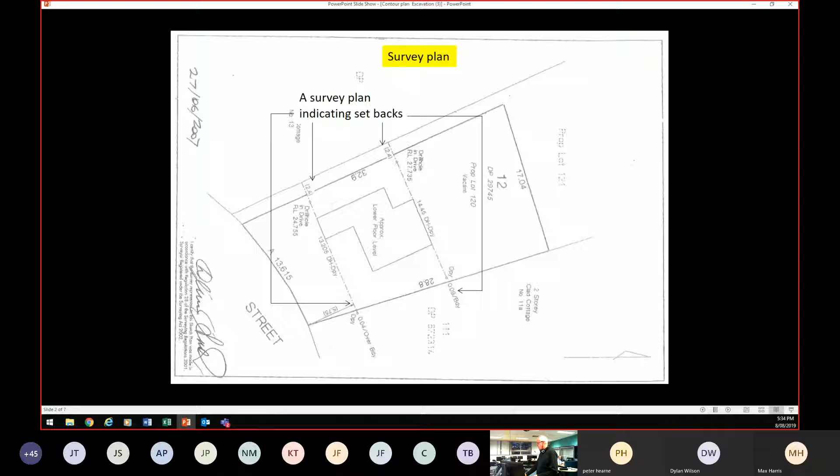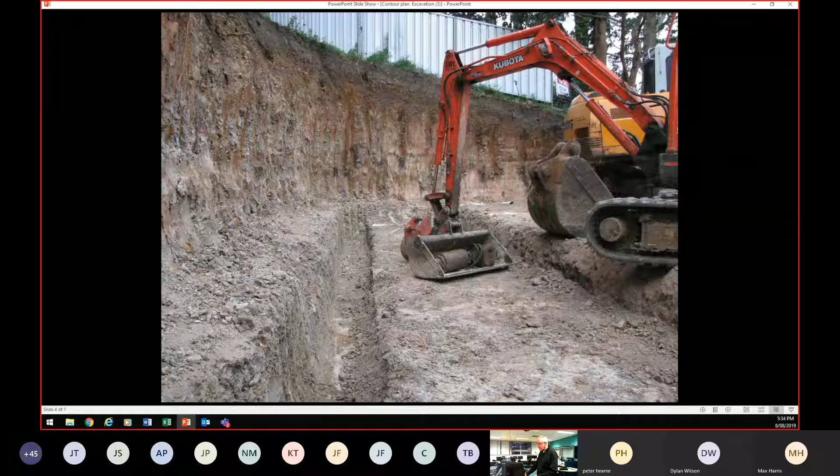This is the contour plan. Now, the next thing that happened from that was the design. In this design, they've elected to go into the hill, they've elected to design the house so there's a garage and entry underneath the house. So this is why you build - you have a contour plan. This height here was around 3.6 meters, 3.4 meters I think it was. So that's a heck of a long way in, and that was a heck of a lot of soil that came out of there.

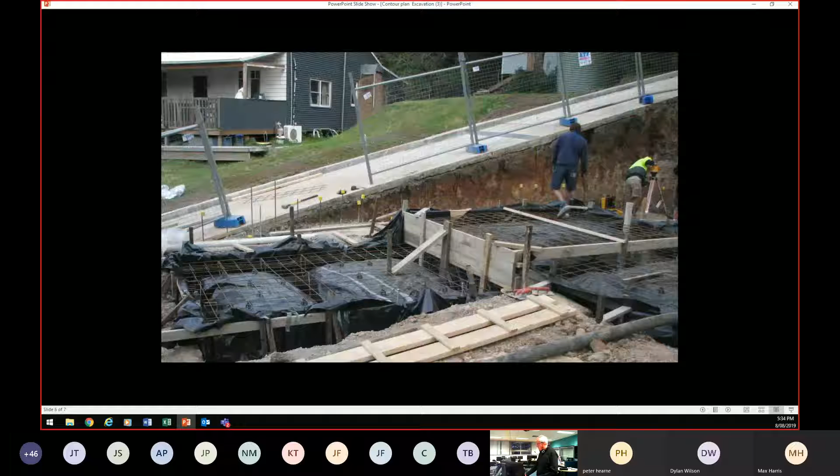And you can see the house was designed for the side of the hill. You've got a maximum height of 9 meters. So this had a skillion roof on it, which was about 8.8 meters, nearly parallel with that driveway there. So the architect actually designed the whole house to suit the block, and the contours play a big part in that. All right, now that's the main thing with contours.

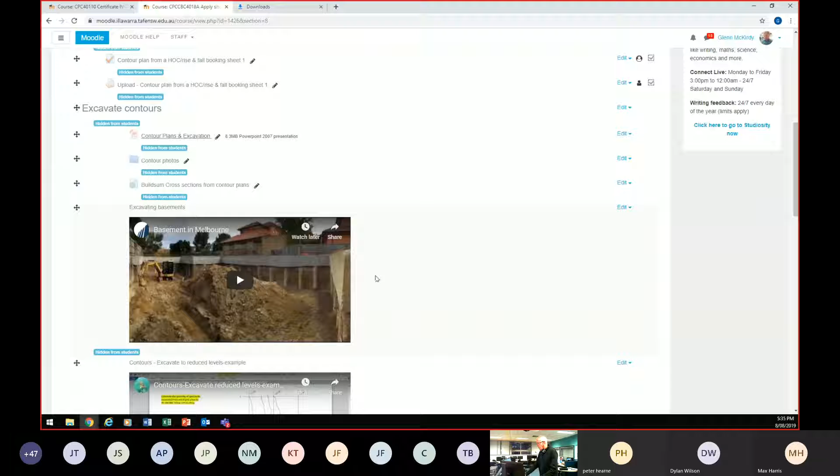I just wanted to show you two other items as well. We'll go with this one. Okay, this is another one. If we look at this, hopefully you can see it. Okay, this is a preformed estate, so they've got different levels here.

So you've got to design whether you actually excavate into the hill and put a garage underneath it, or do you go over the hill? What are the advantages and disadvantages of going into the hill or over the hill? Well, there's advantages and disadvantages in both. If you go over the hill, you're saving the money on excavation, but you've got to actually build the house, you've got to have something underneath the house. But by having a section of the house raised off the ground, it has room for water tanks and some storage. So for my way of thinking, I'd rather build over the hill and not go into the hill myself.

Okay, so that's just that. There's only a couple of photos. That's the house. The house never went any further into the hill. It had a garage in front of the hill and then went over the top. No more excavation was required.

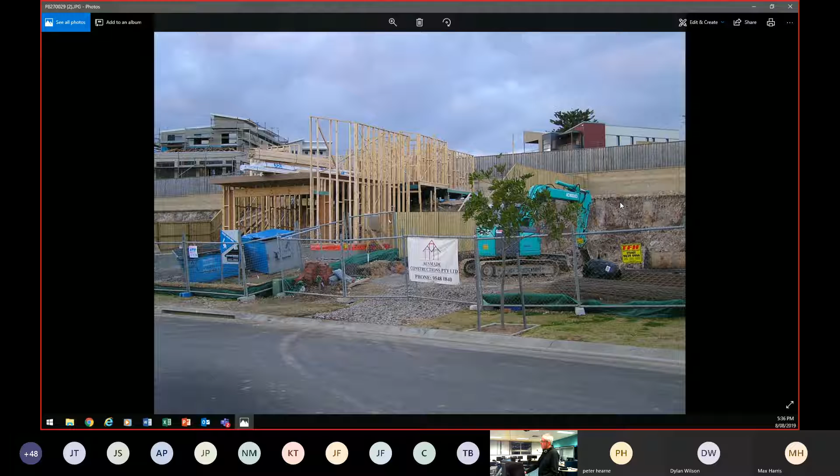Other houses in this estate went further into the hill. They wanted a deeper section in there, to try and extend the house. But for things like that, it costs more money. It can cost more money depending on the design.

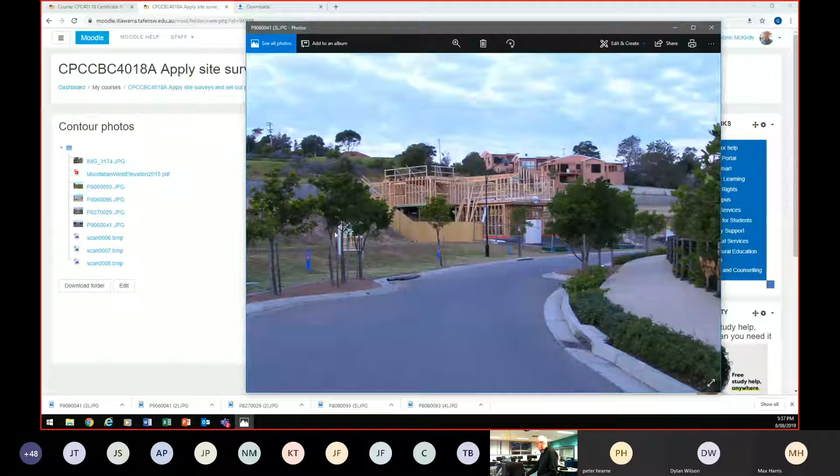That's just another photo of that same house, but you can see the land, the reason for contours. This is the reason that we have contours, though it's not specifically the reason why you're drawing them. I've never, bar at TAFE, drawn a contour - tell a lie, I've probably drawn one. But I knew what a contour plan was and understood it. What you'll get from doing this is an understanding of why you need a contour as well.

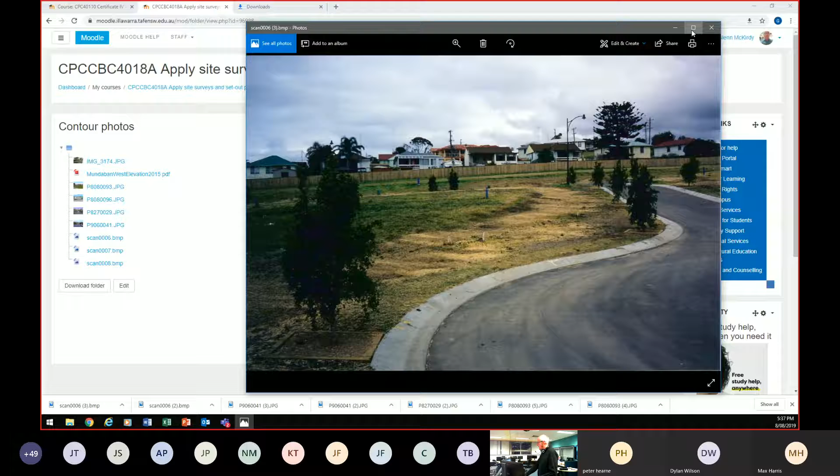There's one. This is another one, just another block of land. How do you design a house? If you look at this, that's on the other side of the road up there. This has maybe a 3 meter fall in the land. So there's a house that goes on that had a contour plan with it, and all these blocks have contour plans with them. You need a contour plan to design your house.

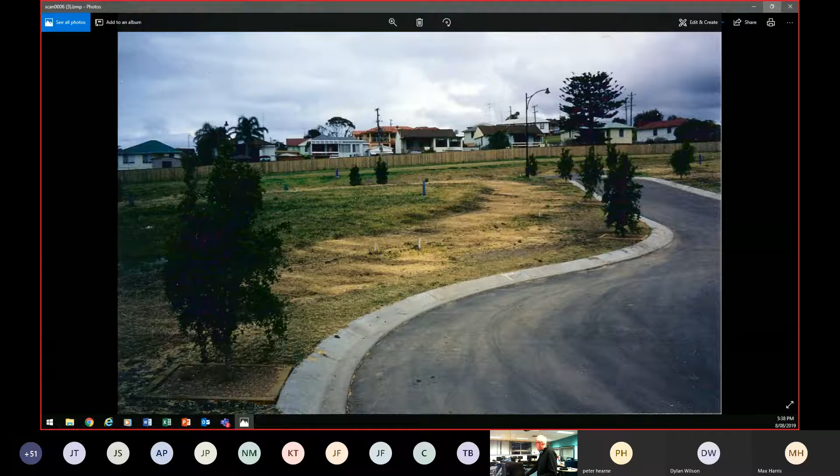Now the wash up for that one was the house from that last block of land. It didn't go into the hill, it went along the hill. There was no excavation for a garage, yet you could excavate for a garage if you want. If I could show you this house around the corner, they excavated underneath for their garage.

So contours play a really important part in the building process. If you looked at this place here, virtually only the footings were excavated. There was no excavation for the slab, no basement area, nothing else. So it actually followed the slope of the land. It had a maximum height - that height couldn't exceed 9 meters, and that height couldn't exceed 9 meters either.

But you could follow that 9 meter slope of the land. Same with that other place, and that's a contour plan for you if you're going to start designing houses or building houses or renovating a house that you already own. You've got to be aware of what you can actually do with it.

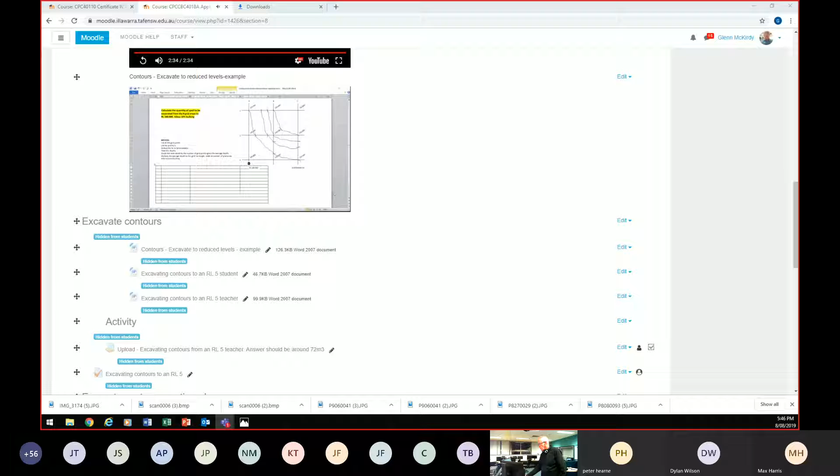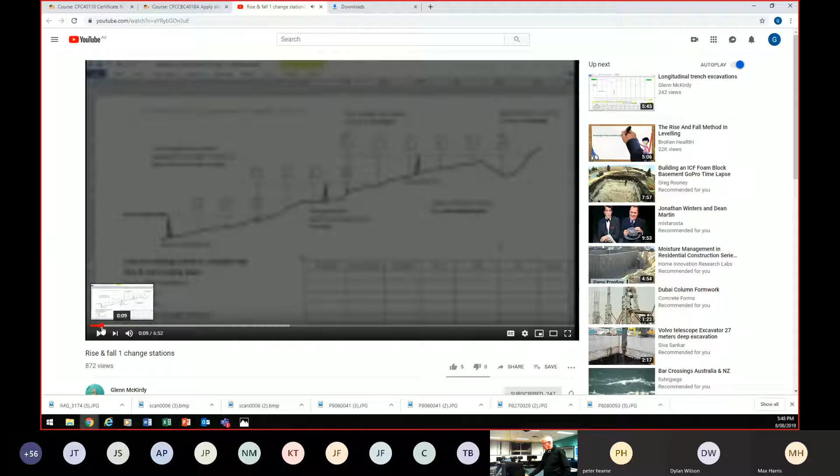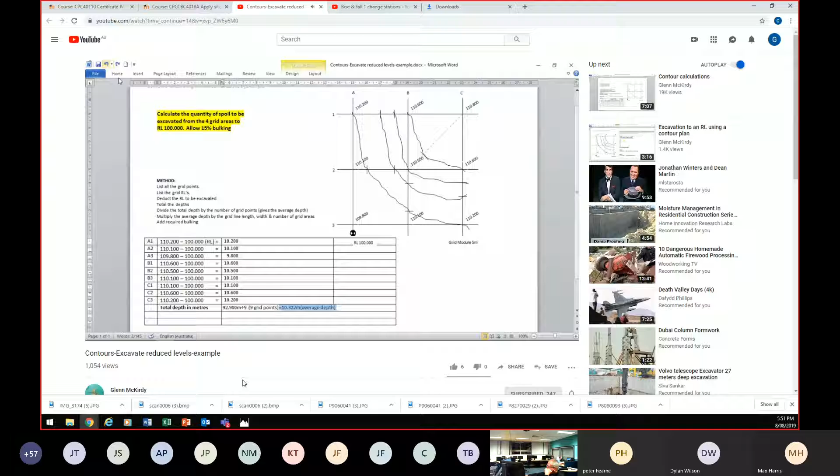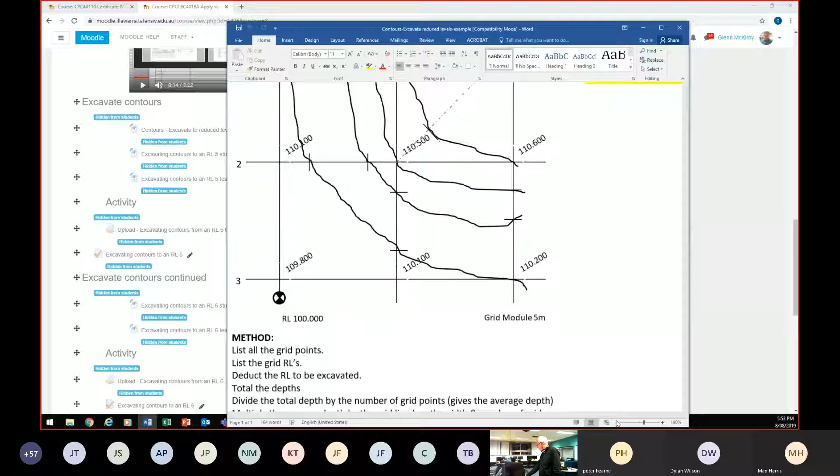What about now? Okay, how's that? We're on.

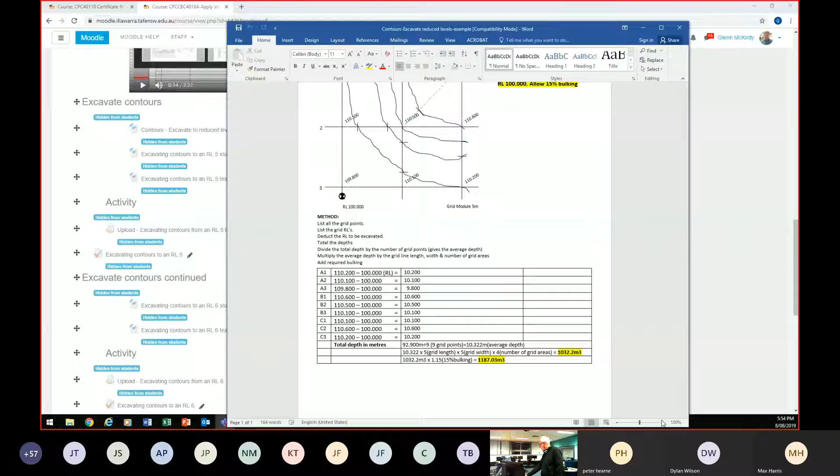All right, look, it's no more difficult than that. If you follow the format, keep your decimals. If you look at this here on your screen, if you start dropping decimals off, it's just such a good practice to get into to keep your decimals in line. Everything there's in line. All right, you can look at that. That one's there as an example.

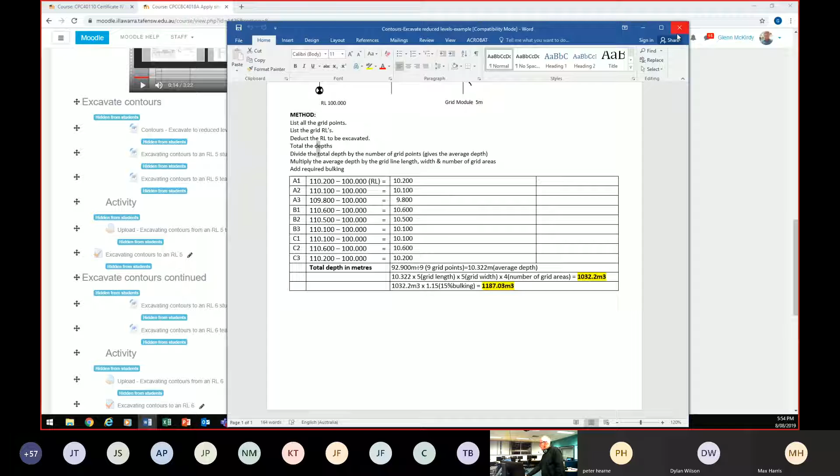So the first thing you've got to do is a continuation of what you were doing on Tuesday night. You'll do a contour plan from a height of collimation and rise and fall booking sheet. Then there'll be an activity to go with it.